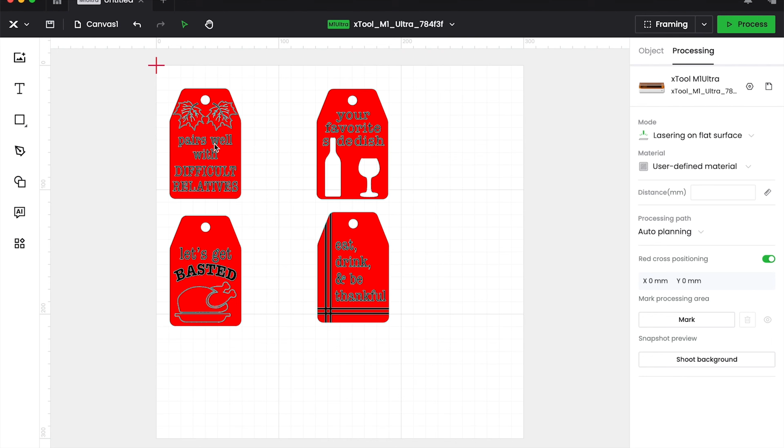I'm going to drag in my SVG, and as you can see it looks a little funny, but don't worry. In the layers panel, you can just click on one of the colors. I'm clicked on black right now. I want to make sure it's set to engrave, and then I need to enter my settings.

I'm using this prior to launch, but I'm going to open up the Easy Set material library, type in basswood, click on it, and make sure I choose M1 10 watt, that's my laser module's wattage, and then engrave. It gives me the settings right there.

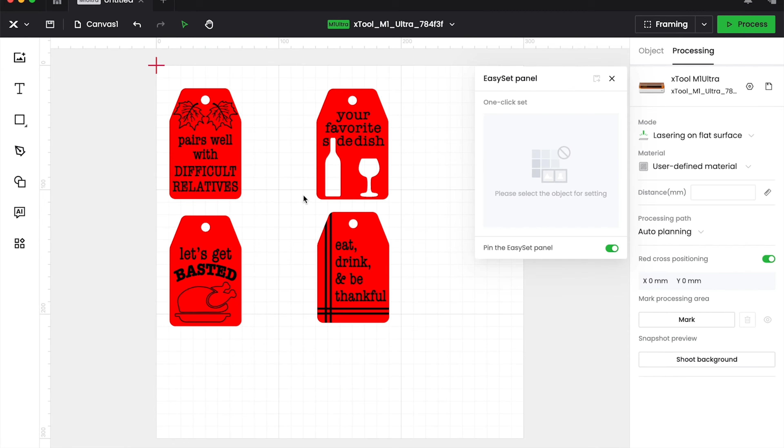All I have to do is click on the black layer and it will load all of my settings at once when I type it into the Easy Set panel. So I'm going to type in 35, 100. I'm going to change the LPC from 100 to 120, and then you'll see I adjust that later.

I'm going to choose the red, set that to cut, and then I'm going to enter my settings for that, which are 106 with one pass, which I will change later because I make an adjustment to my material.

Now speaking of our material, we need to go ahead and load that into our unit. You can use the slats, but I'm on the honeycomb. We need to measure our distance after we get our material inside.

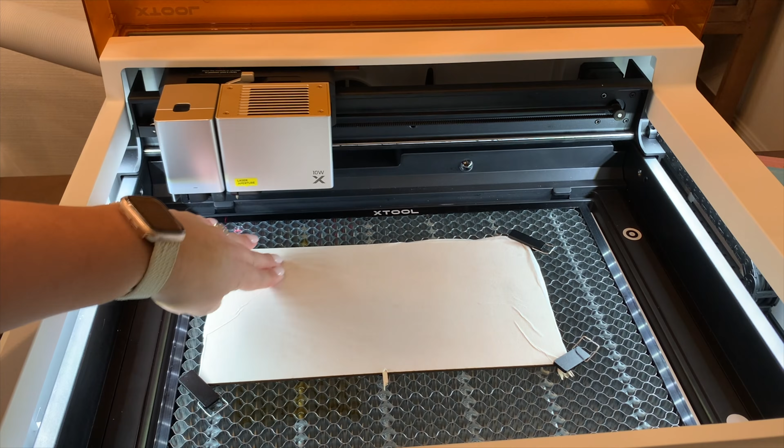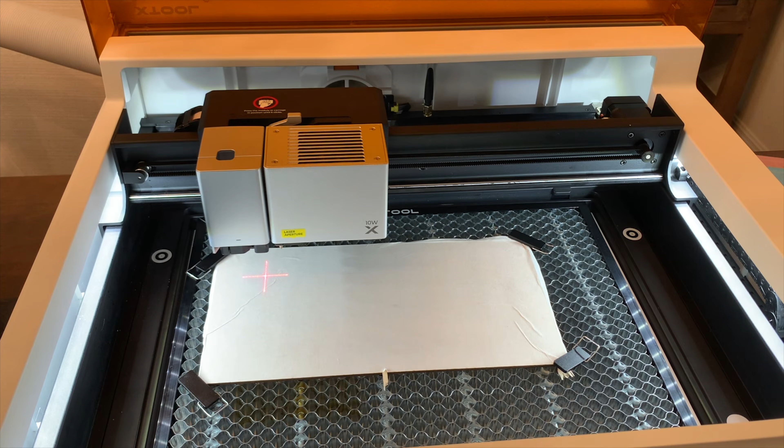You can see I have masking on my basswood. I have it pinned down to my honeycomb because it's warped. Then I'm going to move this laser module's crosshair right over my material and close the lid, because it's required to close the lid when processing, measuring, or marking, framing.

When I hit distance in the software, the entire laser module will come down and auto measure for me. There's no rulers, there's no guessing, this just does it. It will enter either millimeters or inches. If you are in millimeters and want to change, go to the settings for the software at the top left and change to inches.

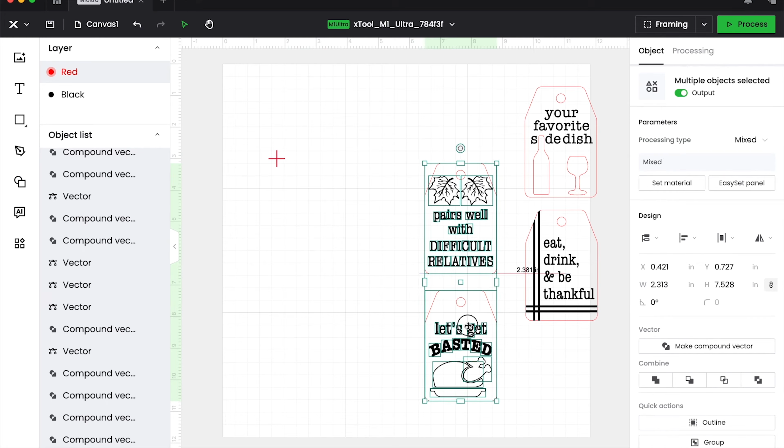Now, I have grouped all this together, but in case you want to ungroup it because you want to make 7 of one and none of the other, you can ungroup it. You can move it as a group, or you can move it individually. Just be mindful if you do ungroup it that you need to make sure it's all lined up.

Our next stage is marking, and this is just telling the laser what to do or where to process. So I'm going to choose a rectangle. This is the screen that comes up. If you position your crosshair at the very top left and hit the white button, that produces the first little red dot. We're going to do that right now.

I'm going to make sure my honeycomb pins and magnet are not in the way, and now that that's there, I'm going to hit the camera, then hit the white button on the front of the machine. Once that locks it in, I'm going to go all the way to the other portion, making sure my honeycomb pins are not in the way.

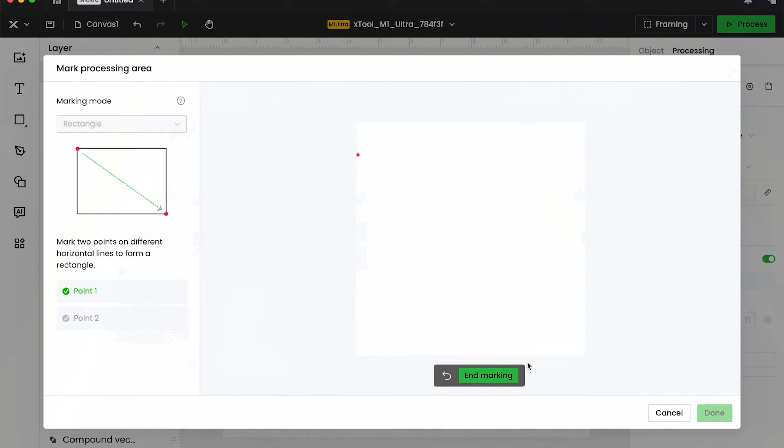And again, hitting that white button. When I do that, you'll see there's a big rectangle. We hit end marking and done. Now we can just position these inside of that area and the laser will know where to process it.

I'm going to go ahead and save this file. I urge you to save your files manually because it does not auto-save inside of XCS. Once you have it saved, you can just validate your settings by clicking on the layers and seeing your settings there.

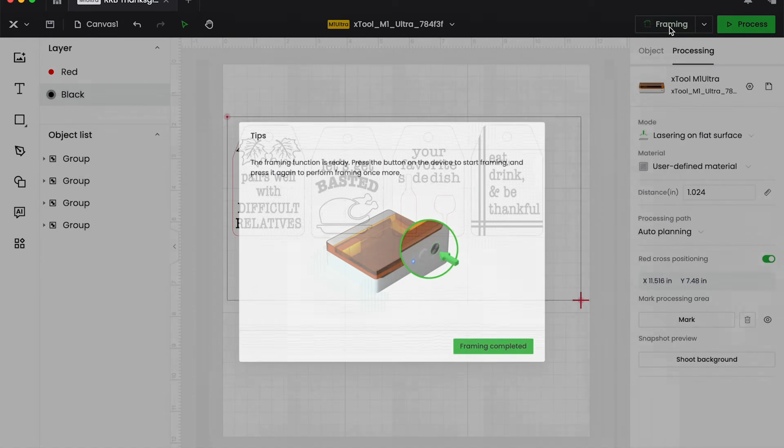Now it's time to frame it. Framing is a zero power pass that will just mark out where the processing will occur. You can see mine is going to take up a majority of the width, but not so much of the height. Now we are ready to have our laser actually process our materials.

I'm actually only going to do one of these because I have to go somewhere, so I'm just going to do this one here. I turn everything's output to off, and then just this one will be on. Remember, you have to set the engraving and the cutting.

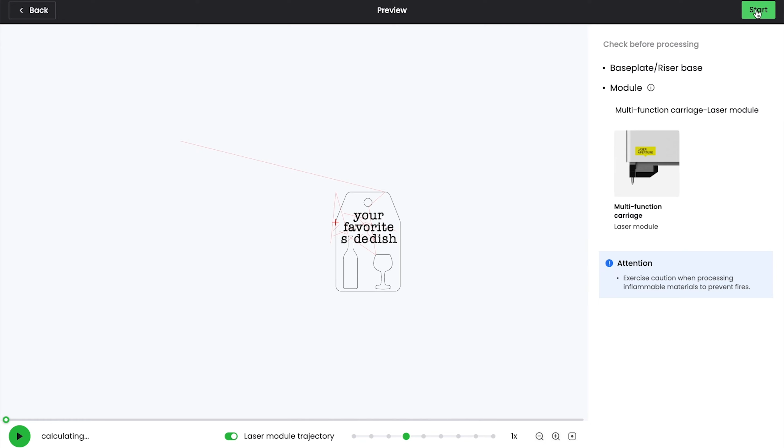When you choose that and you choose the start, it will send the file to the machine, and then you can hit start on the machine and turn on your purifier if you're using it, and then your machine will process. So I had a question, which is: what happens

if I made a mistake? Don't worry, you are the controller of this little mini universe here. I didn't like the engraving the way it was, so I hit pause and cancel. It'll give you a little warning.

You're like, no, keep going. So I'm going to go back to those layers I told you about. You can go in the bottom left-hand corner, click on that, and choose whichever layer. So I'm going to choose black. I'm going to change all of my settings for engraving to 55 power because I have masking on, and when we're working with a 10-watt laser, it really does matter.

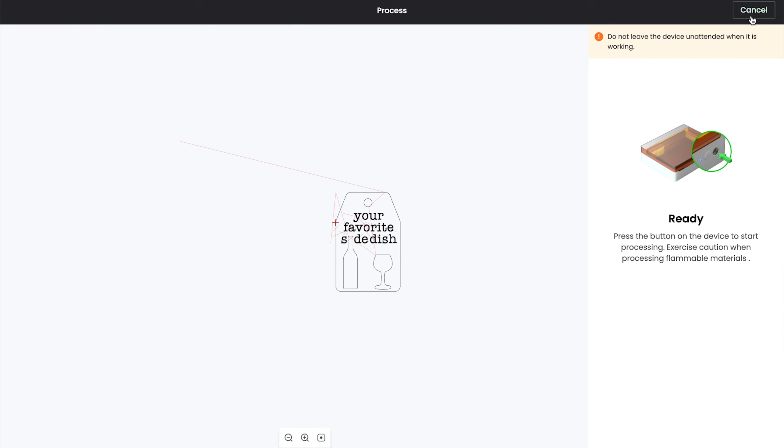So I'm going to go ahead and start processing again, right over exactly where we were. We haven't moved the material, we haven't changed the distance, we just start processing again. So you'll see, I'm going to speed this up, but you can see it looks pretty light. Don't fret, I promise you're fine.

Okay, so now after it stops with the last piece of engraving, it immediately starts cutting. Again, you are literally doing no extra work here, the machine is doing it all for you. I let the fan run for a few seconds to remove any of that smoke or detritus.

Now, do not move the material and just try and pick it up. So you'll see here, mine doesn't pick up, I have a little hangers-on somewhere. So I'm going to go to the Easy Set panel, choose all of red, and make 2 passes.

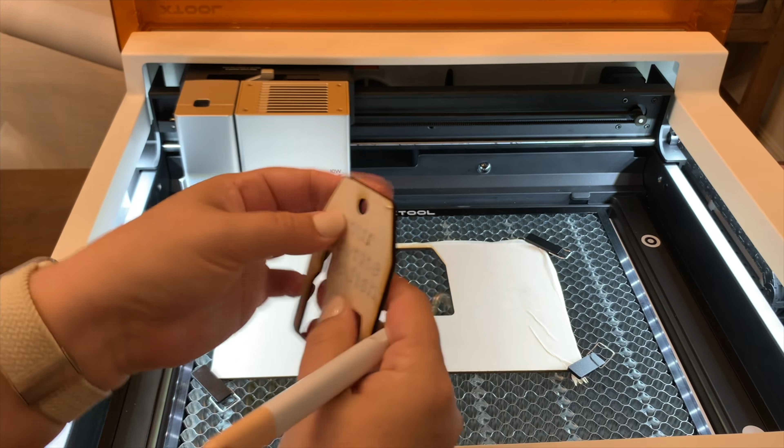Again, I haven't moved it. Once that is done, again, because I just reprocessed the cut, just the cut, not the engraving, look at this. Let's see what it looks like under here, straight out of the machine.

That's pretty nice, that's pretty nice. Now I do wipe out the edges, I'll show you in a second, just because I ran 2 passes.

So when I got back from Taekwondo, I just processed the rest of them, following the exact same steps. Everything is already set, all I had to do was just press start. Turn the output for this one on, the other one's off. And you can see I just wiped the outside edge, removed the masking.

Look at that, there's a little bit of that masking in there, so I'm going to get that. You just pick that right off. You can also use tape. Look at that, straight out of the machine.

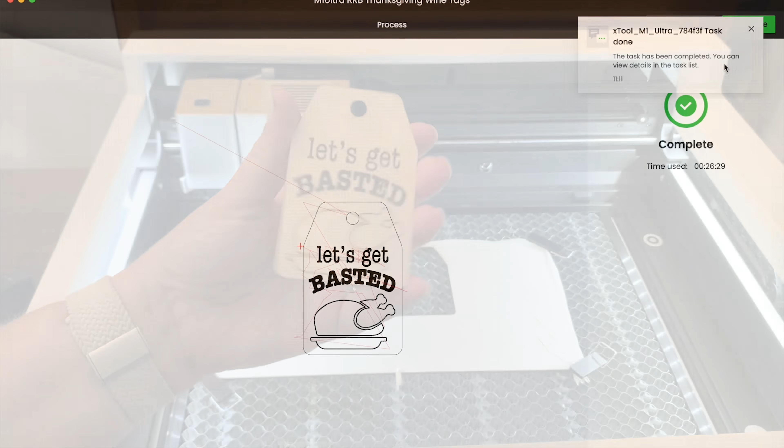That looks good. So anyway, I just processed the other 2, and then I do have a hint. Again, you can save this throughout periodically or whatever, but I do have a hint. Right when you remove everything, you want to take it outside and go ahead and spray it with a sealant. We want to make sure we lock it in and we don't bring any smudges to our projects.

So you can decorate these any way you want. I just put them on a fairly short bit of twine because they're very rustic to me when it's done in wood. And so I'm just prepping for a couple of Thanksgiving gifties here. I'm going to use a little bit of this gray buffalo check ribbon. It's super easy to do.

We're just locking it in under our twine so we don't even have to do anything, right? Just dovetail the edges, pull your twine tight, put a little bit of masking tape on the ends, and just thread some beads through.